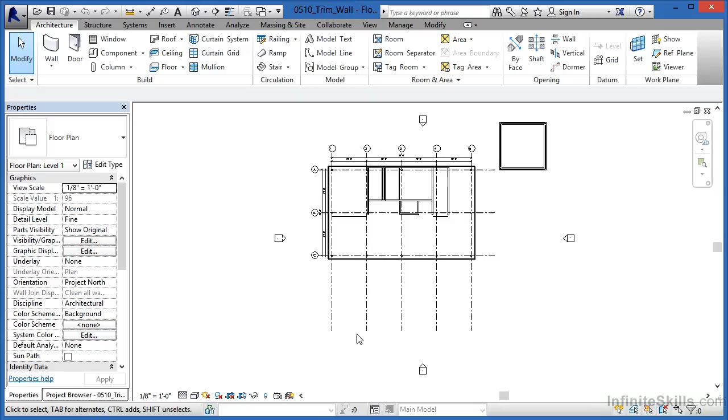The trim command allows two walls to come together at a common intersection. To see that, let's zoom in here to where we have column grid 2 and column grid B crossing each other. I'd like to have this wall and then this curtain wall to come together at a common intersection.

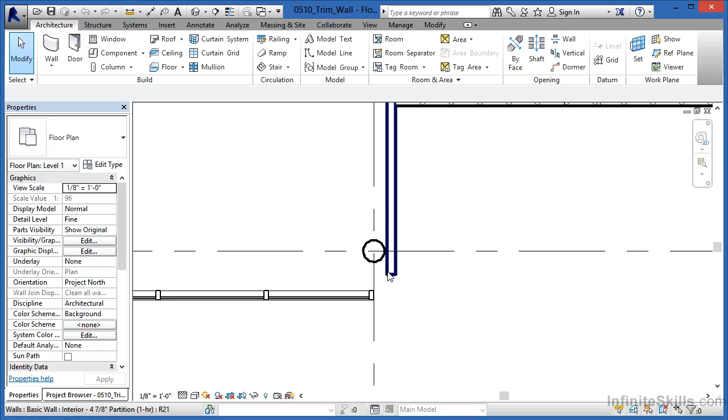To do that, I'm going to begin by selecting on the wall itself. After the wall's been highlighted, take a look up here on the ribbon. And there are technically 3 different commands which are considered the trim command. The first one, and the one that's really probably the most common, is trim extend to corner, where you select on one wall, select on another wall, and they both come together at a corner.

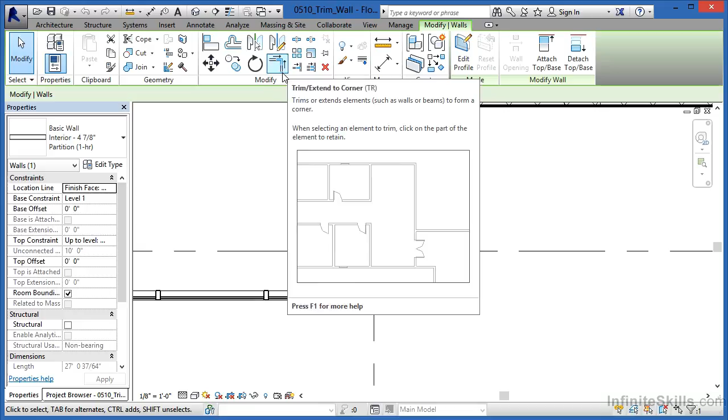We're going to try that with this particular wall, and I'm going to tell you right now that it's not going to work quite right. And that's okay, but I wanted to show you what the effect is going to be. So, select here on the trim extend to corner. Click on this wall, click on the line there that makes up the curtain wall, and it looks like it's going to bring them to a corner.

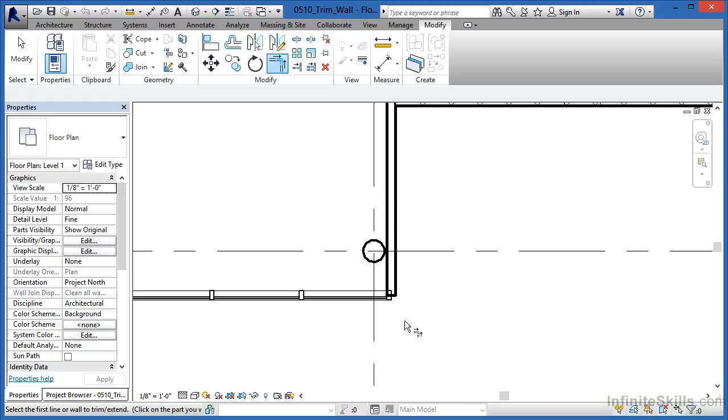But as you can see, they're hitting each other and not really cleaning up the way that you'd like them to clean up on one another. The reason is that one of these is a curtain wall and the other is a basic wall. Now, if this had been 2 curtain walls, they would have cleaned up on each other just fine. If these had been 2 basic walls, they also would have cleaned up on each other just fine.

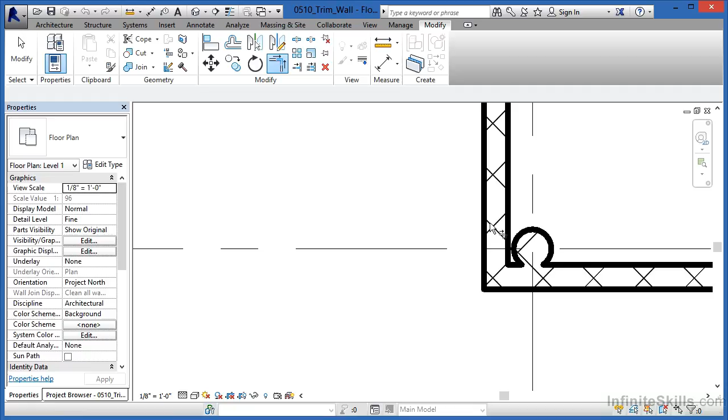And when I use the term clean up, it means that when the 2 walls touch each other, they'll have a nice, smooth material transition in between the 2 of them, as opposed to what we have here, where they just hit each other. So to undo this, I'm going to hit escape a couple times on the keyboard, come up here to the undo command, and click the undo arrow. Now they've been pulled back apart again.

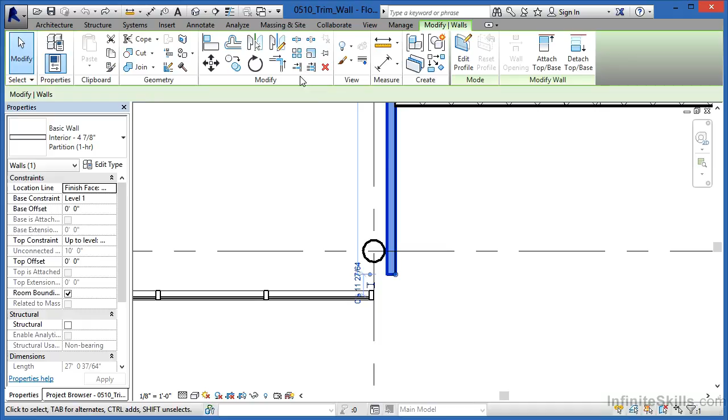Select once more on this wall. And there's 2 other kinds of trims that we could try instead. These 2, in fact, work almost identical to one another, except trim extend multiple allows you to do more than one, and this first one just does it once. Let's use this trim extend single element. So click on that, move down here, and down here you'll be able to see it says select a reference as the trim extend boundary.

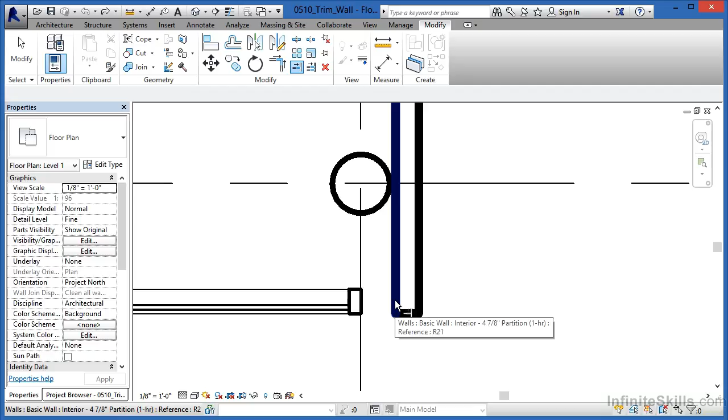What it wants us to do is select on the face, in this case, of this mullion. Now click the end point of this wall. When you do that, it's now brought this wall down, so it's now perfectly in line where the edge of this mullion is at. Now let's do the same command again. We'll want to select on this face, and then bring this over so that it lines up here at the intersection. So there's 2 different, or technically 3 different types of trim commands that are available to us.

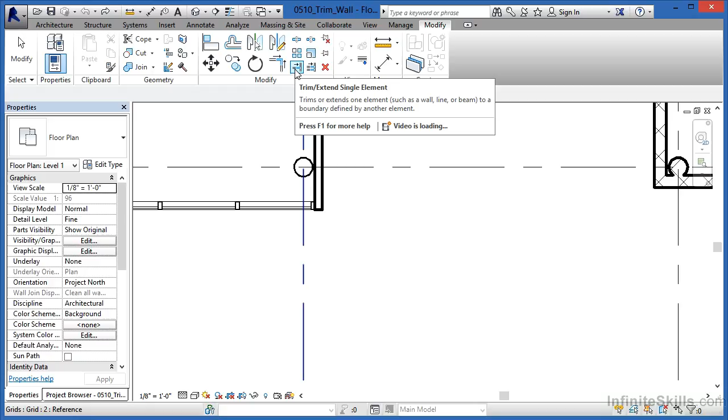The first one, which is trim extend to corner, on regular walls, such as these 2 basic wall types over here, it'll bring them together to a perfect corner and have no material problems. They'll just clean up on one another like this. In certain conditions, though, you may need to use trim extend single element. By using that, you can bring one wall down and line it up with another wall. By using that command twice, you can then bring them together.

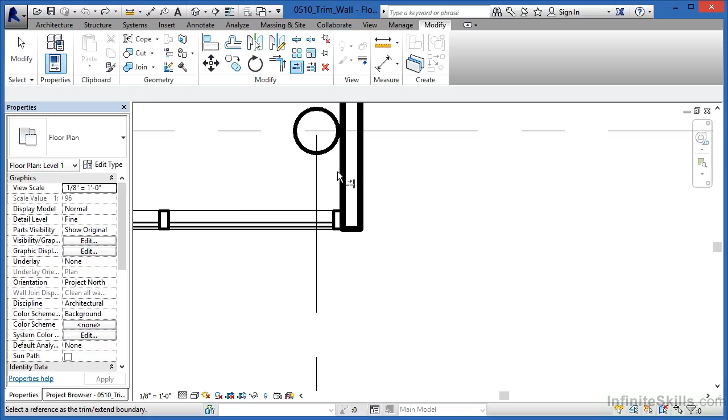The third option, which is trim extend multiple elements, would have been if we had 3 or 4 walls we wanted to bring up and have go flush against the face of this wall. We could have picked this wall first and then picked each of the walls we wanted to stretch themselves out and hit the face of this wall, and it would have worked with multiple walls instead of just the one wall.